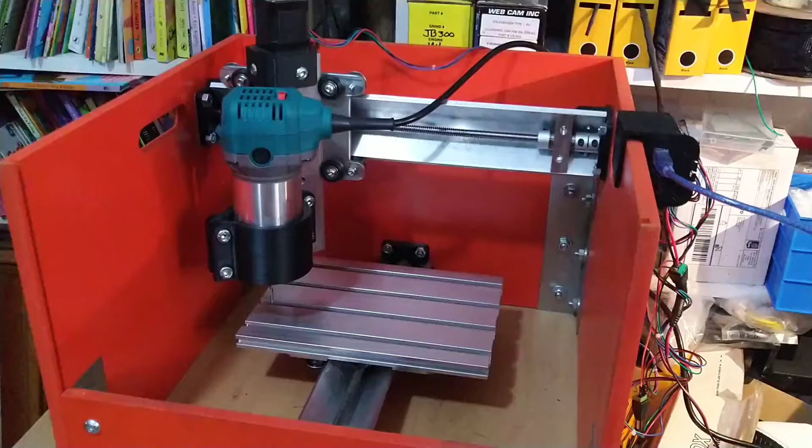So this is my finished CNC Mill 1, or my modified Mill 1.

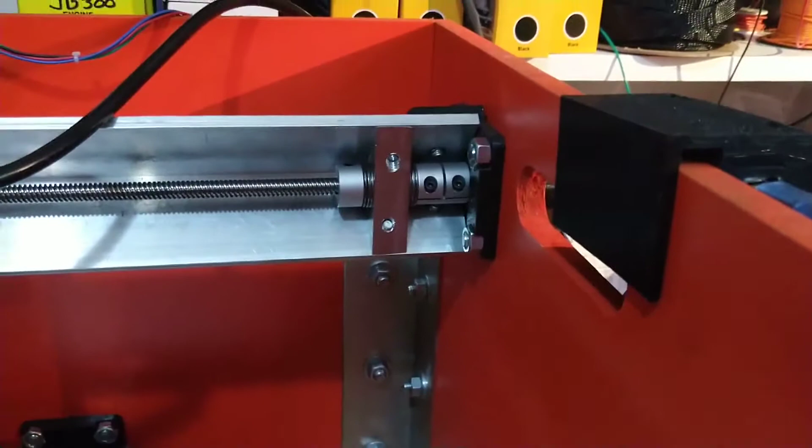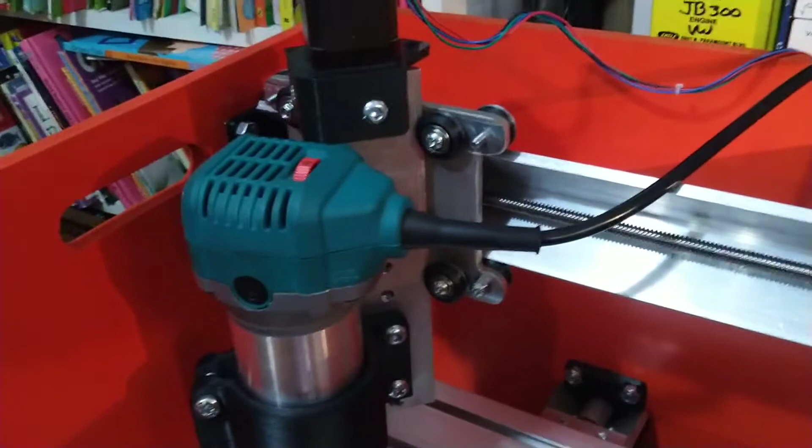I've improved on the original design by adding things like thrust bearings to the axes to stop any play. I've added an aluminium T-slot bed, much more beefy, stronger brackets in the corner to hopefully keep it a bit more rigid. But essentially it's the same design other than that. And I've made aluminium carriages as well to help try and remove some of that deflection you get with the plastic stuff they used originally.

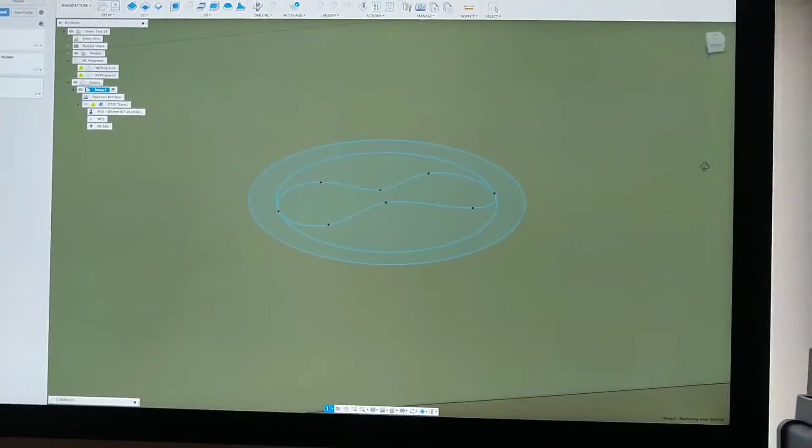So I'm using Fusion 360 to make the designs. It has a post processor for Grbl, which is what the CNC runs from. Uses a Protoneer CNC shield. I've got this running with an Uno at the moment, but I've also got it set up with an ESP32, which gives it Wi-Fi and also has a built-in web interface, which is good.

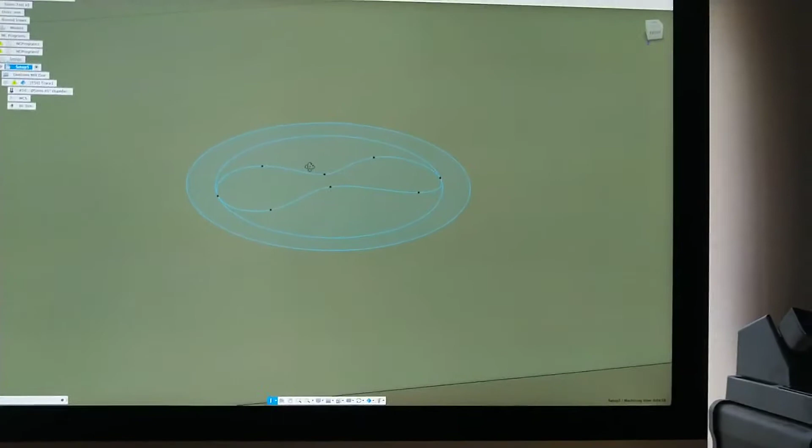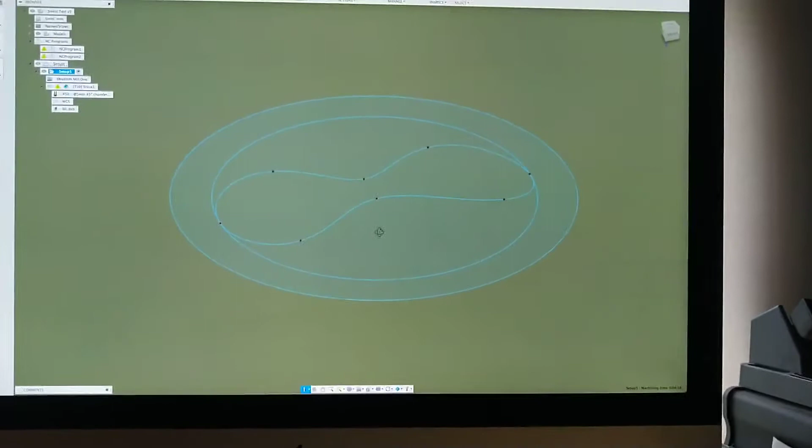So this is just a quick test. It's very early days with this. I haven't actually cut anything, so I'm just testing out the motion. This is an engraving path I've just put together as a test. I want to be able to engrave some logos. But essentially I can export from here using the built-in post processor without any need to tweak that.

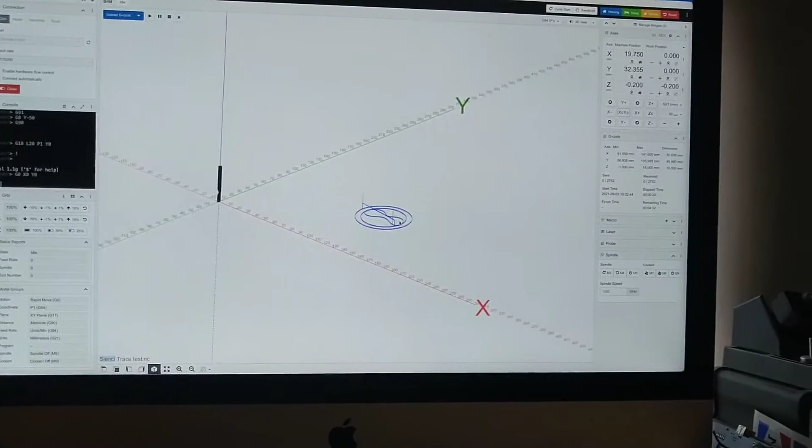So basically it's spat out a program that works straight into CNCjs without any modification. I'm using CNC.js, which is a control program for Grbl and a bunch of other stuff, 3D printers, etc. It acts as a way to control the machine and send it files. So we can upload the G-code file here. This is the G-code file that Fusion 360 spat out without any mods, like I say. It's completely generated the path here without any need to do any tweaking.

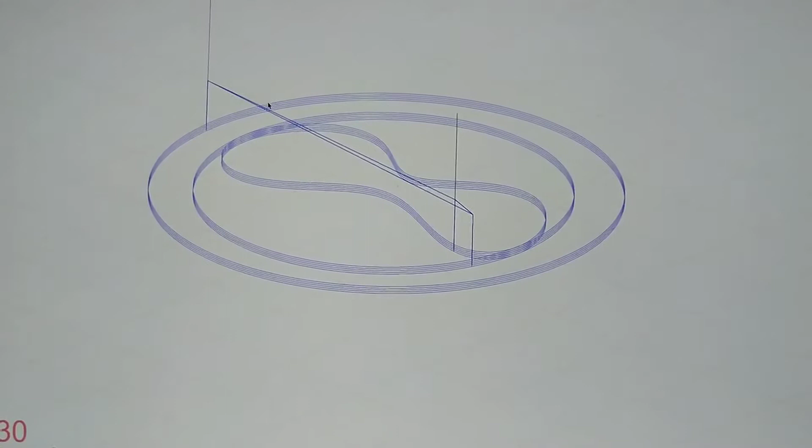Now there's some intermediate moves which are a bit strange. We've got these really high clearance moves up here, which is not the regular stock clearance moves, that's these ones here. So the path could certainly be optimized, but hey, for something that just works straight out of the box, it's not too bad.

So we can start the machine, and you can see the machine going through its paces. It's fairly noisy, sounds a lot noisier in here. Obviously when the spindle is running, the noise of the motors is pretty much going to be drowned out. Now I don't have stock here, so I've just set the Z0 to an arbitrary position above the bed. But you can see it's tracing the path pretty much exactly as it's shown on the screen. We've got a nice animated drill bit there, showing us what's going on.

And I've programmed this with an engraving bit with successive cuts just to make that engraving path a little bit deeper each time. Speeds and feeds, I still need to find out what the capabilities of the machine are. It's not so much governed by the speed of the bit and the speed of the machine, it's probably more governed by the deflection. So if the machine is stronger, which I hope it is, then hopefully I should get some reasonable cutting speeds out of it. But if you go too hard, there's a chance the tool will deflect, and that's going to be reflected in accuracy.

So yeah, overall pretty pleased with it. I just need to do some final tweaking. I've got to make some clamps for the bed so I can bolt some stock onto it and try and take some cuts and see what it does. Thanks for watching.